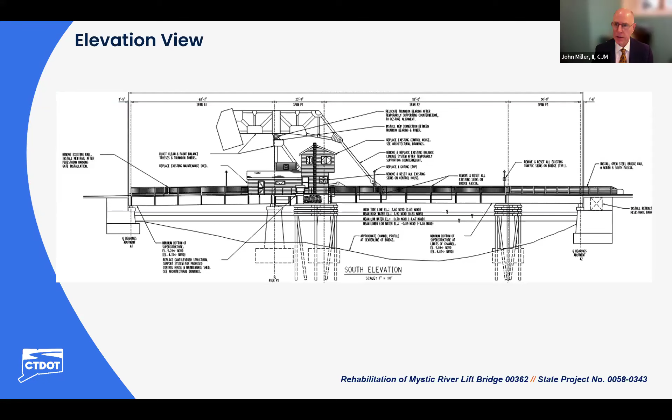The purpose of this project is to address load carrying capacity, structural, mechanical, electrical, architectural, fender, and waterway deficiencies, to keep these in a good state of repair and extend the life of the bridge. Bikeway enhancements will be provided to improve bicycle passage over the open grid deck.

The existing bridge was constructed in 1922 and rehabilitated in 2013. Again, it consists of 4 spans, 3 simply supported and 1 single leaf bascule span, stone face masonry, concrete abutments and piers with concrete caps.

The dimensions are 220 feet overall length, 33 feet measured curb to curb, and 48 feet measured out to out, which includes sidewalks on both sides of the bridge. The bascule lift span is 85 feet long, and the bull wheel operation of this bridge is visible from the roadway, which makes this a unique and popular attraction.

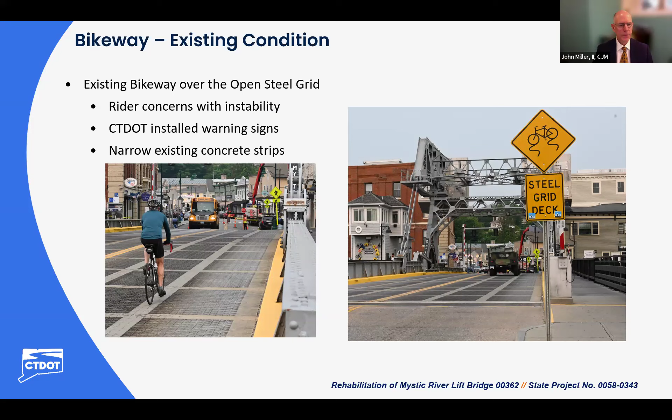These enhancements are based on conversations and discussions with the city of Milwaukee, who has similar bike riding concerns on its open steel grid decks.

Therefore, extensive coordination with ConnDOT's maintenance and other stakeholders will be necessary over the course of the design to provide a product that will ensure safe passage of bikes and other vehicles while minimizing maintenance costs. The department intends to monitor these plates following installation and evaluate their performance. If major safety concerns are discovered, the department will reevaluate their use at that time.

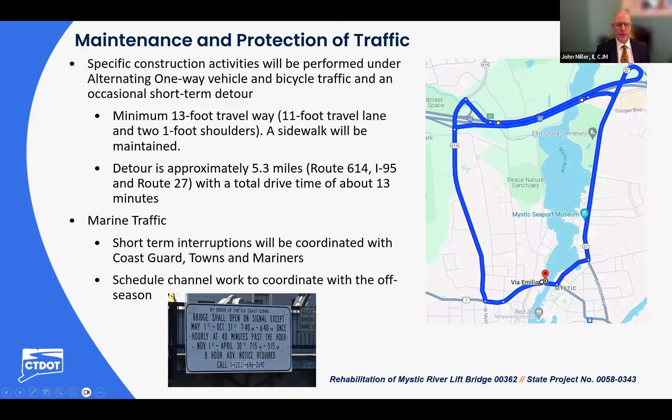For environmental permits and requirements, we are expecting a significant permitting effort for this project, including but not limited to a flood management general, Connecticut DEEP Land and Water Resource Division certificate of permission, Connecticut DEEP marker permit, United States Army Corps of Engineers Section 408, and a United States Coast Guard temporary deviation permit.

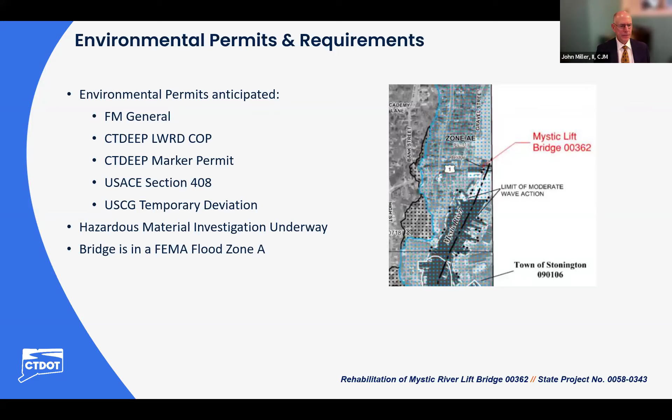And the next slide shows a map of current and future ConnDOT projects in the area. We've reviewed this information and determined that these projects will not have a significant impact on the proposed rehabilitation project.

I'll now kick it back to Meziane, who will go over the current schedule and cost associated with this project. Yeah, thank you, John, for the presentation.

So the current schedule is shown on the screen here. We are anticipating to complete the preliminary design phase by the end of September of this year. This corresponds to the start of the final design phase. Final design plans or FDPs are anticipated by October of next year and start of construction in the spring of 2026. We anticipate a 12-month construction season.

The total cost at this time is 3.7 million, with 80% federal and 20% state. No town funds are needed or required. And obviously, the cost and schedule are preliminary and are subject to change in the future. So keep that in mind.

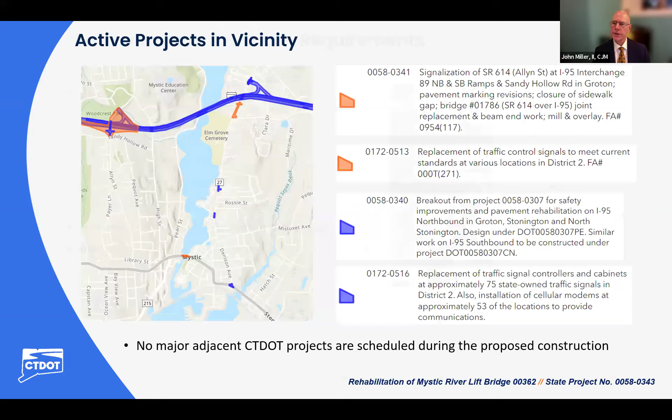The projects in the vicinity that we have reviewed to date don't appear to present any kind of problem for the work that we've proposed. Again, if there's a VIP paving project on US Route 1, I'm sure we can coordinate the two, and that will be included in the contract documents.

Thank you, John. Another question from Ben. Where do you anticipate staging to take place?

That's a good question, and again, thank you for the question. A lot of this work takes place in the pit, let's say, mechanical pit.

And also the control house and the fender system. In general, the steel repairs are by nature, they're not like we're coming in with all together new beams. So we don't envision a lot of heavy and highway type work.

I feel that the alternating one-way condition with traffic control will be adequate for the huge majority of work, that we can stage our work within that lane closure and not cause a disruption to the adjacent parcels and businesses. As you know, I'm sure space is very tight in this area, and it's a heavily traveled corridor as well.

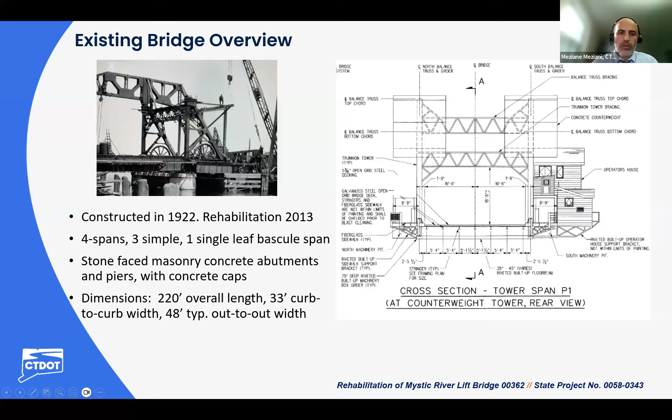I can go back to the schedule here quickly. Yeah, so we're anticipating to start in the spring of 2026. 12 months after that, we should be done. But as we said before, this is preliminary for now. As we move forward in the final design, we will have a better idea of when to start and when to complete the project.

Let me just take a look at questions. All right, another question from Rosemary. Will the work be primarily done during the daylight hours, or will there be work done overnight?

I expect most of this work to take place during the daytime hours.

Question from Deborah: Will work be done on the bridge on weekends and holidays?

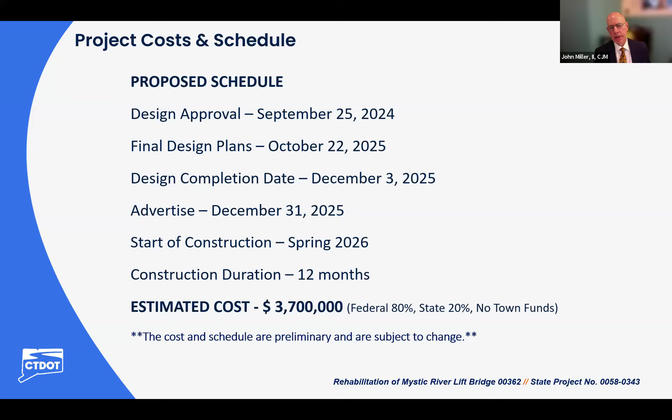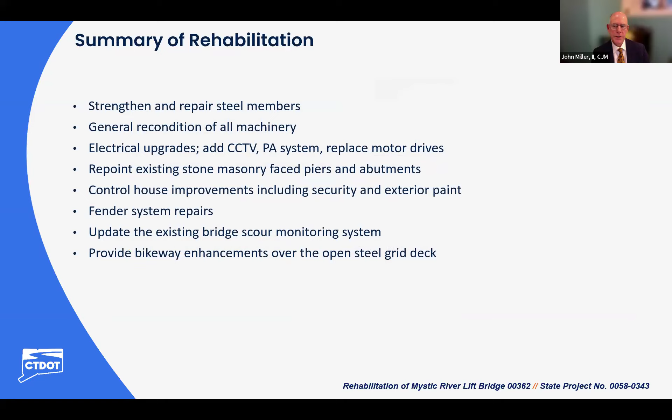We will have limitations of operations addressing what the contractor can and can't do. I don't feel the types of equipment and materials will necessitate anything that would prohibit your use of the existing parking. Our work is going to be pretty tight and contained to the bridge, and it should not impact the parking. As far as workers go, I do feel we're going to need to include language in the contract to let the contractor know they're not expected to use up all the parking at this site. So we'll be addressing that as we get further into the contract special provisions and limitations of operations.

Thank you, Dan. Another question from Kate: Is any environmental mitigation going to be included as part of this project?

I don't expect any mitigation other than the usual. We do have a hazardous materials review still ongoing at this point, so depending on what comes back from that, we'll react accordingly. But there shouldn't be a need for mitigation because I don't believe we're going to have any impacts.

Thank you, Dan. Right now we don't have any other questions, so if you have any additional questions, please feel free to type them in.